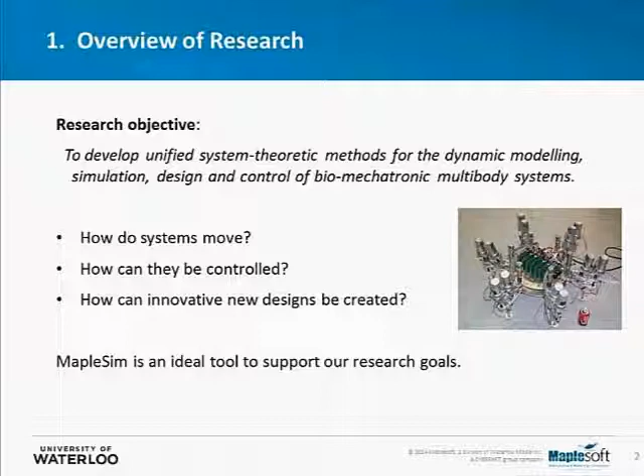In my lab at the University of Waterloo, we mainly focus on dynamic modeling, simulation, design, and control of biomechatronic multi-body systems. To be more precise, we're trying to answer questions like how do systems move, how can we control them, and how can we better design them? For these goals, we found that MapleSim is a very useful tool to support this research.

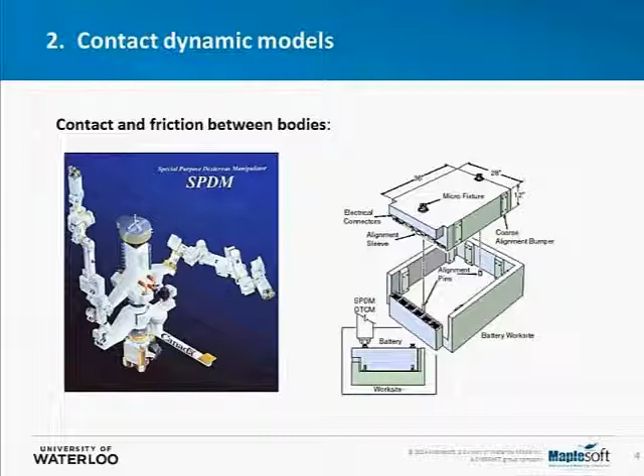Our goal was to create high-fidelity models of these contact dynamics that ran reasonably quickly. Now, when we looked at the literature, we found a couple of things.

First of all, people were doing a lot of modeling using impulse momentum methods. This is an approach where you use a coefficient of restitution, and impact is assumed to occur with time basically frozen. This works very well in computer games where you're not so particular about the accuracy of the physics.

In contrast, a continuous dynamic model would actually represent the contact force between the two bodies during the period in which they are in contact. Now, the most common approach is to assume contact at a point between two bodies and use something like a Hunt-Crossley model, in which the contact force is some function of the depth of penetration between the two bodies. So the two bodies are assumed to interpenetrate, and that more or less gives you a nonlinear spring with some damping to force the bodies apart.

And so at the bottom, I've shown a plot of what would happen if you drop the ball inside a cylinder using this Hunt-Crossley model. The ball will bounce and then roll without sliding forever, because once it starts rolling without slipping, there's nothing to dissipate energy.

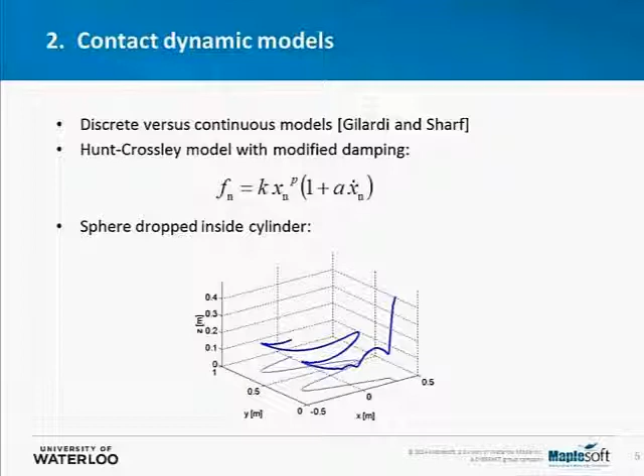We wanted to model contact over distributed surfaces, so we looked at using a Winkler foundation model, in which you had a distributed contact load over the whole surface. Well, it turns out that when you integrate that contact force over the surface, you now find out that your contact force depends upon the volume of interpenetration and not the depth of interpenetration.

And there's a couple of other nice things that naturally arise out of this approach. For example, when you integrate those contact and friction forces over the surface, you naturally get a rolling resistance moment also appearing in your dynamic model. So if we drop the same ball inside the same cylinder, it now bounces, rolls, but then rolling resistance will eventually bring it to a stop, which clearly is a much more accurate representation.

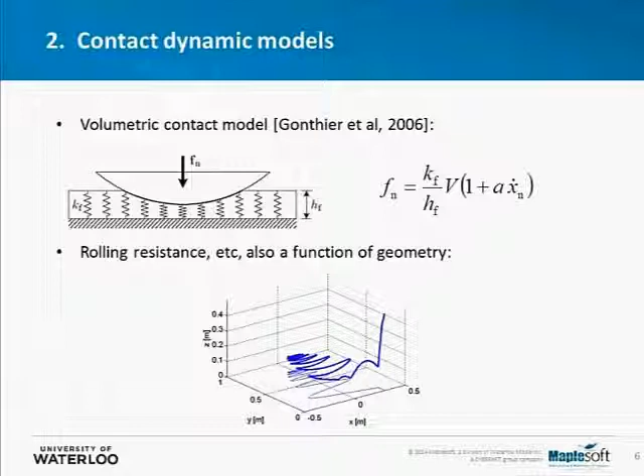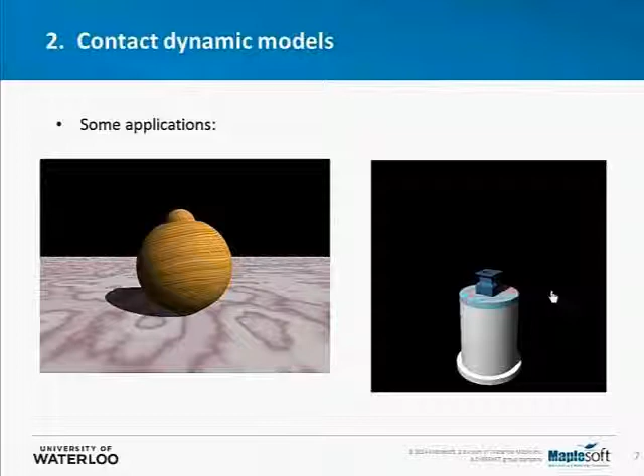We've done a number of applications. On the left is a well-known tippe-top toy. I'll show you an animation of that in a second. On the right is a famous benchmark problem. It's called a peg in a hole, and it involves contact over surfaces with friction.

It was relatively straightforward to implement our model inside of MapleSim. We did this using a custom component in which we could directly code our mathematical expressions. On the left is a representation of the two bodies in contact. On the right is the MapleSim implementation.

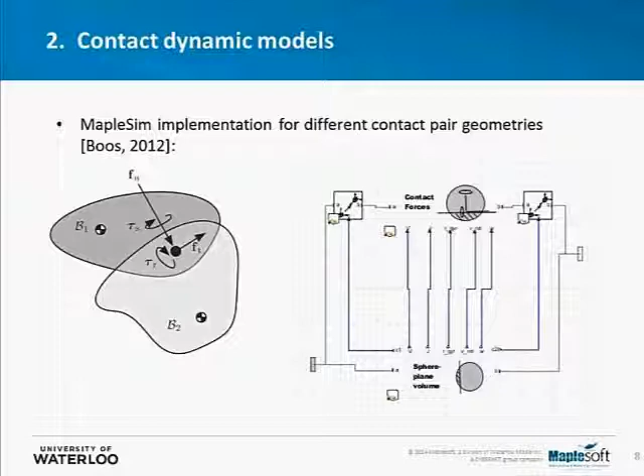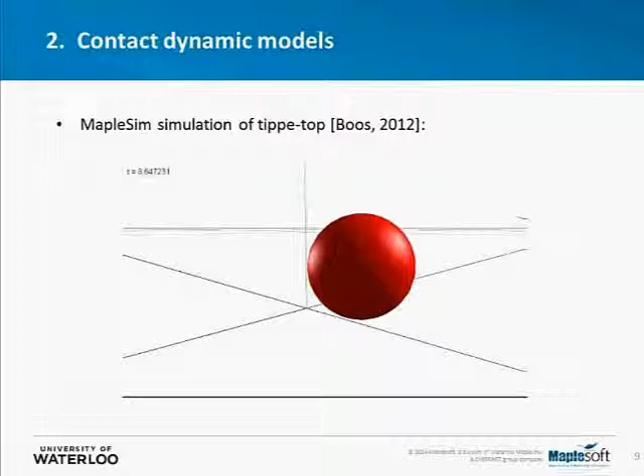And once we had done that, we could go back to that tippe-top and we could simulate the response. And if you've ever played with one of these toys, you'll know that when you spin it, it actually flips over onto the peg until eventually you dissipate energy and it stops rolling. This is a very difficult system to simulate, which is why I'm showing it to you.

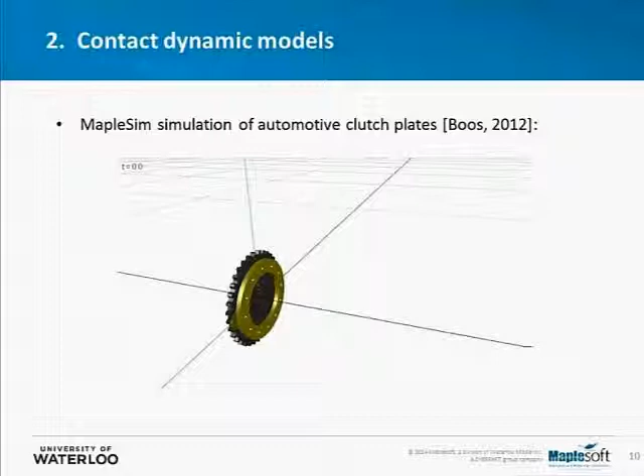Next project also involved the Canadian Space Agency, and this was when they started to investigate planetary rovers. Now on the left is the so-called Juno rover. It's a prototype of a future space mobile rover. And it's being tested on the big island of Hawaii.

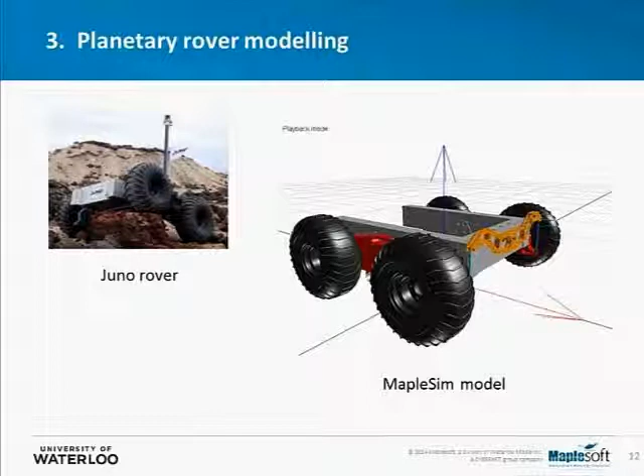On the right is our MapleSim model. And what we've been able to do is capture the unique triple rocker design of this particular machine and see how it moves over rough surfaces. There's a rocker in the front, which connects two rockers on the two sides, and on the two side rockers, two wheels are mounted. This arrangement allows any one wheel to move over a fairly large obstacle.

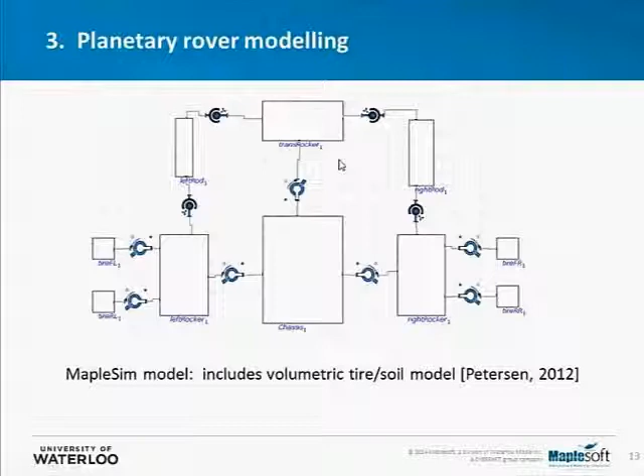This is a MapleSim representation, and on the lower right we have two tires. On the lower left we have two tires, and they both connect to those rockers on the side, which in turn connect to the main chassis through pin joints. There's a rocker at the front that allows wheels on one side to move up in the air relative to wheels on the other side.

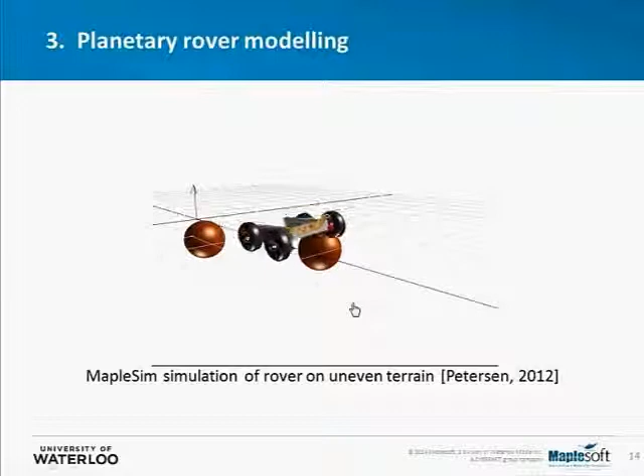And this is best shown through a MapleSim simulation and animation, in which you can clearly see that we can accommodate any one wheel going over a large obstacle.

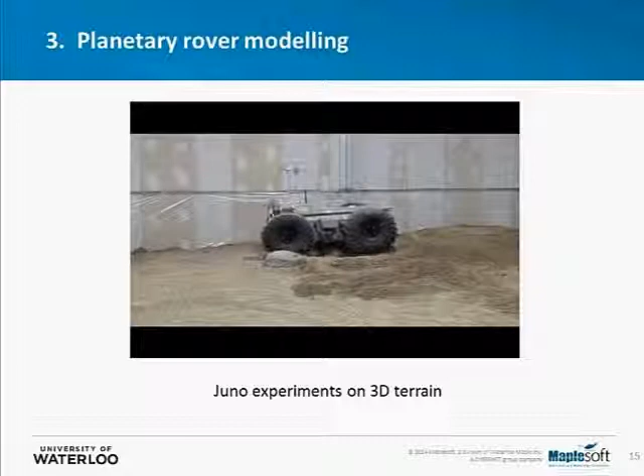We did some experiments on the actual vehicle in order to gather detailed data for model validation. The one thing about planetary rovers is that they don't move very fast, so the dynamics are not always that exciting. In this particular case, we had it going over a 3D surface made up of soft soil, as you might find on the Mars surface.

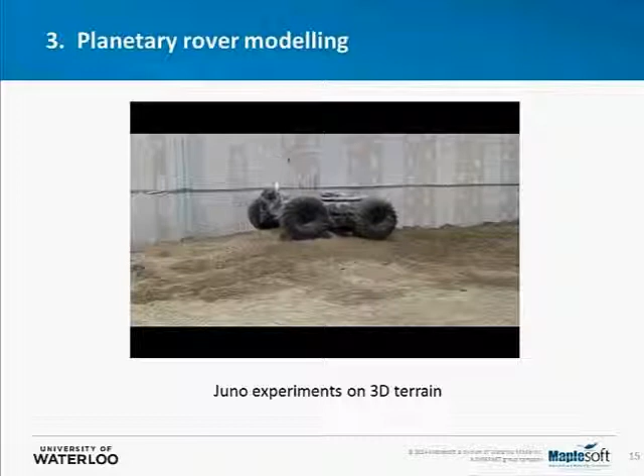We did a 3D LiDAR scan of that surface and developed special models for the tires interacting with soft soils, which allowed us to create this MapleSim simulation of those experiments. The 3D LiDAR scan was used to create the surface in MapleSim. We used our model with the specific tire-ground interface contact forces, and we were able to show very good agreement between our MapleSim simulation and our experimental results. Again, the dynamics are not very fast, so it's not the most exciting maneuver to watch.

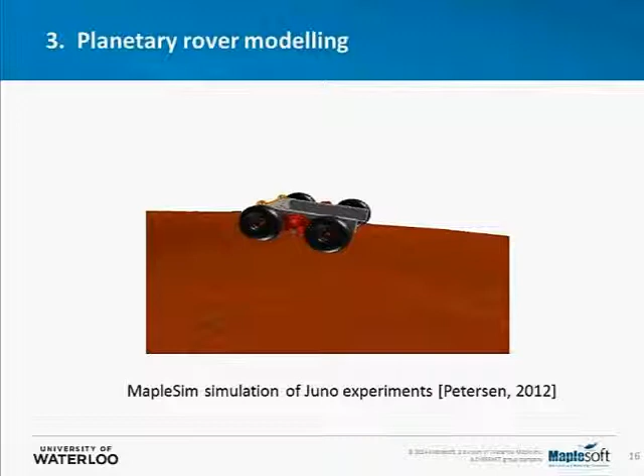I'll now move on to talk a little bit about some of our work in biomechanics and sports engineering. In a lot of this work, we're trying to develop predictive models that will tell us how assistive devices or training devices will help the user. So we're trying to do forward dynamics, in which we specify forces on the system and predict the motion. This is in contrast to most approaches to biomechanics, which measure the motion ahead of time and work backwards to figure out what the forces are.

That's fine to do, but it means you're always doing user testing, and you can't do truly predictive simulations. So we've used our MapleSim model, which is based upon a linear graph representation if you look under the hood for the theory underneath, with Maple symbolics that give us fast simulations, and our previous contact dynamics models. We have a balance controller to make sure that our human walker doesn't fall over.

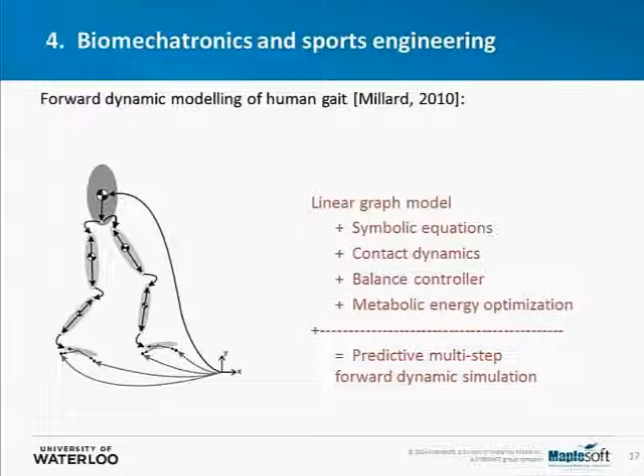In order to create natural gaits, we're minimizing metabolic energy consumed during a gait cycle, because experiments have shown that humans walk in such a way as to minimize their metabolic energy consumption. So to discover these natural gaits, we're using an optimization routine in which we call our MapleSim models over and over again many times. That's one reason why we're using MapleSim in this work, because we require very fast models that simulate quickly, since we need to run them over and over again. What I just showed you was a simulation of a gait that was entirely discovered by an optimization algorithm that minimized metabolic energy.

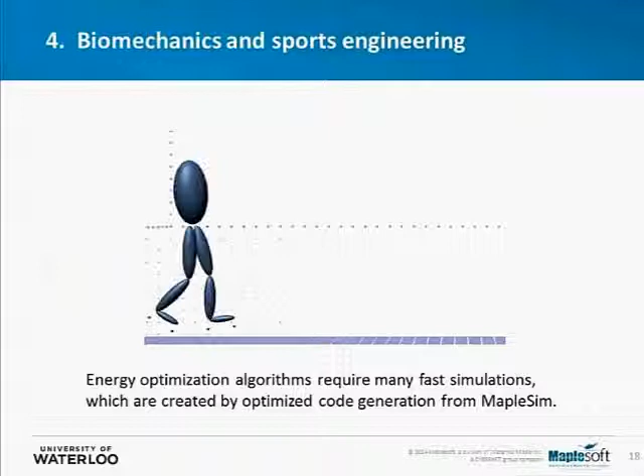We've since added a detailed muscle model to our human walker, and that muscle model includes muscle activation and contraction dynamics. It includes muscles wrapping over surfaces as they pass across bones and joints. And again, it uses that previous volumetric model for foot contact.

Now, we need to validate these models always to make sure that we're representing reality. In our lab, we have a number of useful tools for measuring ground reaction forces and human motions, and we can go back and validate our models to make sure that they're representative of reality.

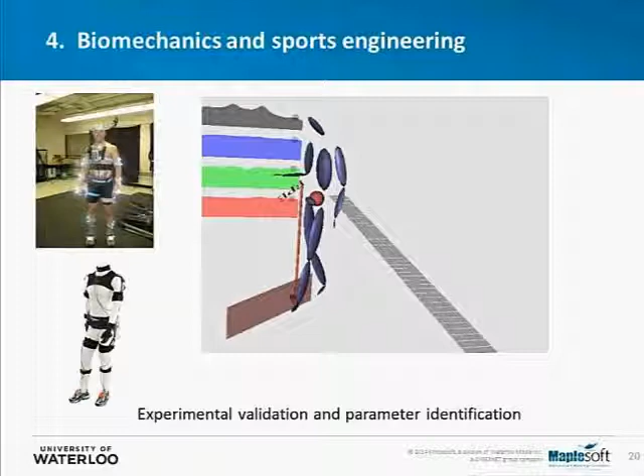Here's another project that we've been working on for quite a few years, in the area of golf equipment design. Some of this work is being done with companies like About Golf and Cleveland Golf, as well as the magazine Golf Digest. What we found is that golf equipment is becoming extremely good. In fact, it's somewhat reaching the design limits that are set by the United States Golf Association and the Royal and Ancient of St. Andrews. So now what companies are interested in is matching the equipment to the human.

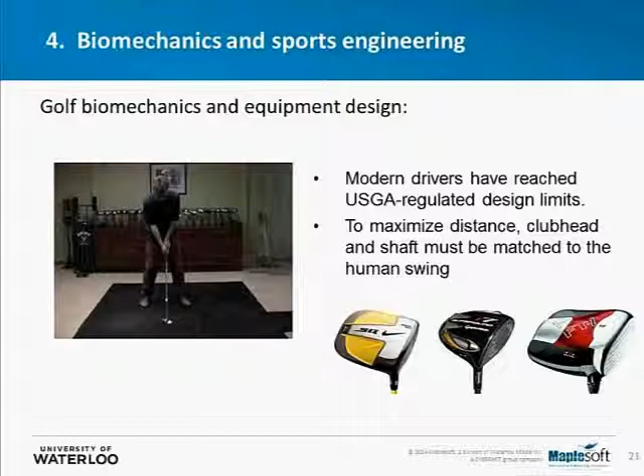That's where our detailed models of club and equipment come in. In this particular MapleSim animation, we've represented the golf shaft by a flexible beam model from MapleSim, which allows us to model a varying stiffness all the way down the shaft. So the shaft might be stiffer at the top or stiffer at the bottom, varying all the way down, and can be tuned for different golfers. The characteristics of the individual golfer are measured and input as 6-degree of freedom motions at the grip. The club itself has known mass and inertia properties that are entered into the MapleSim model. This is a project that we did for Cleveland Golf.

If you simulate and animate the response, you'll see all the characteristics of a normal swing, including the fact that the shaft is bending ahead at impact in order to launch the ball at a higher and farther trajectory. So we have very good agreement between our MapleSim model and a number of experiments that we did to validate the model.

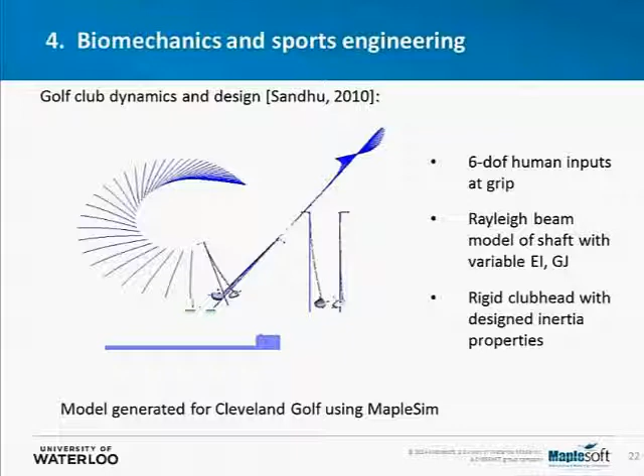Switching to perhaps a more Canadian sport, hockey, although I'd add that Canada is the defending gold medalist in golf, which is returning to the Olympics in 2016. That's a little plug for the Canadian Olympic team.

In hockey, we see something you don't see in golf, and that's equipment breakage. In particular, we see a lot of hockey sticks being broken during the course of a game. Not only does this affect the team negatively during play, but it's a huge cost issue for the teams and players.

In golf, we do a lot of robot testing. Here I have a picture of the famous Iron Byron, which is used to test a golf club. The question arises: why don't we do this for hockey?

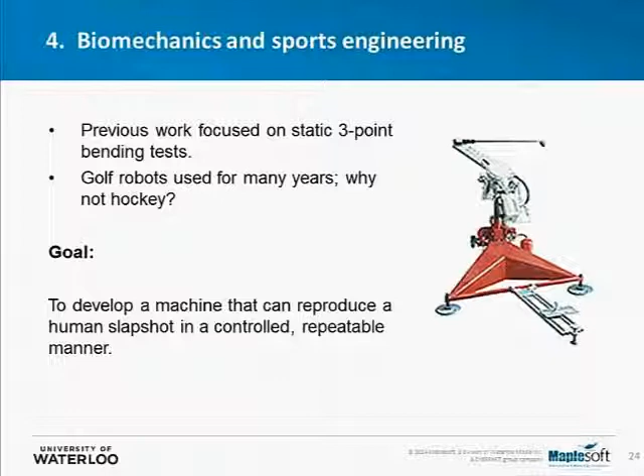The fact is that with hockey, you have to hold the stick in two locations, and the stick needs to be able to bend through a very large angle between those two locations. So we eventually came up with what we thought was a winning design.

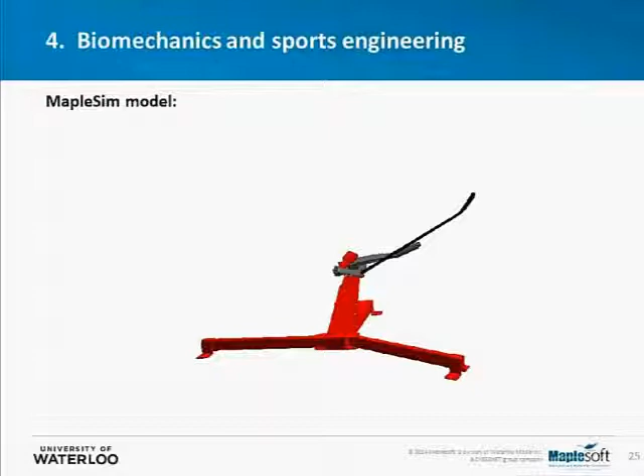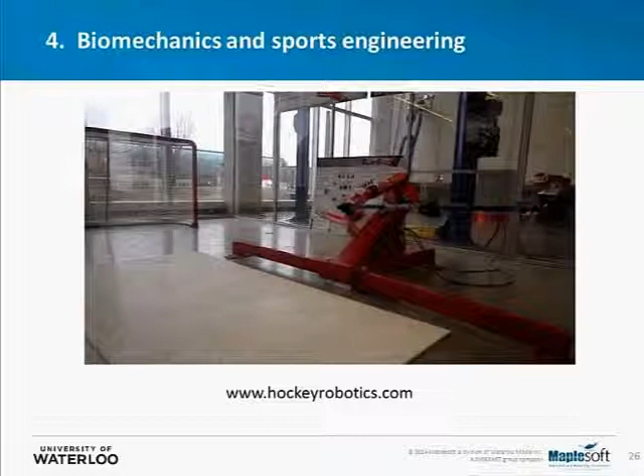I see I only have a couple of minutes left. Let me move on to the last topic, hybrid electric vehicle modeling. In this case, we're using models to improve the design of hybrid electric vehicles, but we're also using models to tune the controllers for these vehicles.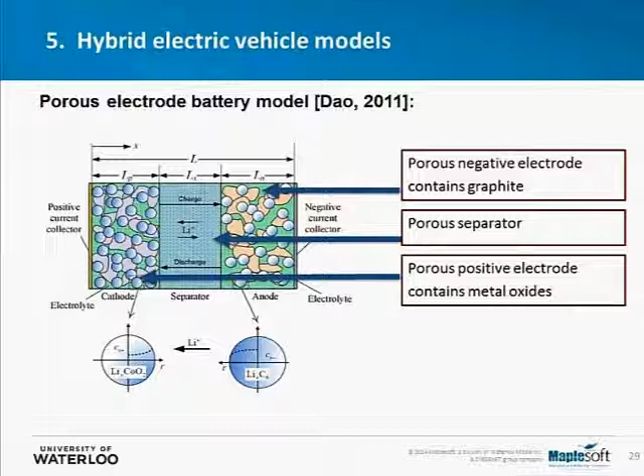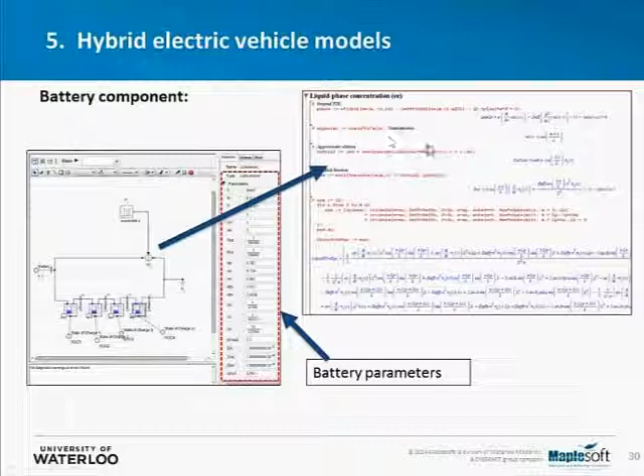For example, for a lithium-ion battery, we've used porous electrode battery theory, representing the changing concentrations of lithium ions from anode to cathode. These are represented as partial differential equations within our custom component template, which we then solve within MapleSim to simulate the battery's response. Comparisons against discharge and charging experiments show really good agreement.

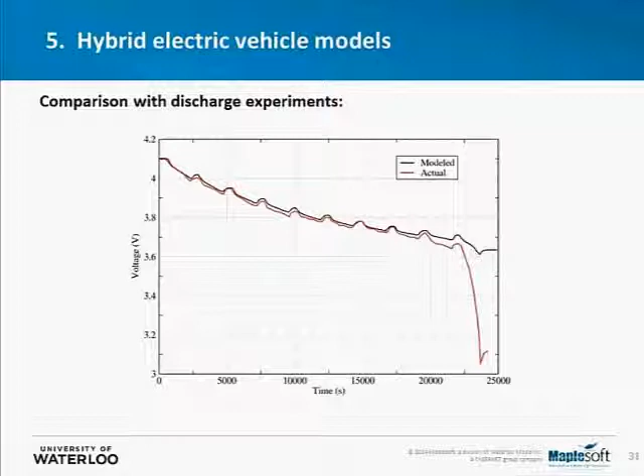We've also created fairly high-fidelity models of internal combustion engines, including the throttle valve, the intake manifold, and the combustion occurring in the engine cylinders. Finally, we've attached a dynamometer to subject the engine to different loads, again for validation purposes. These are all coded as custom components within MapleSim.

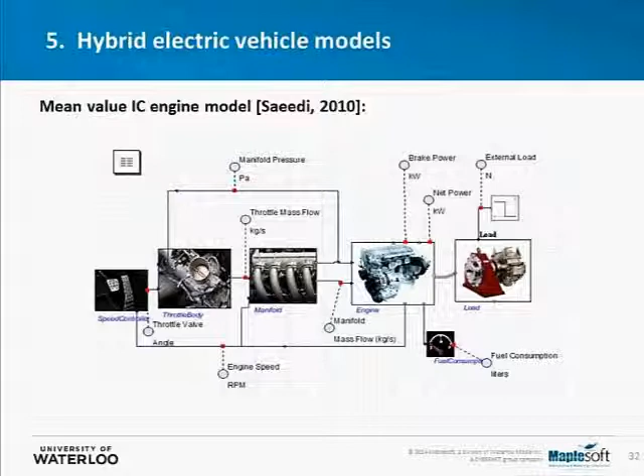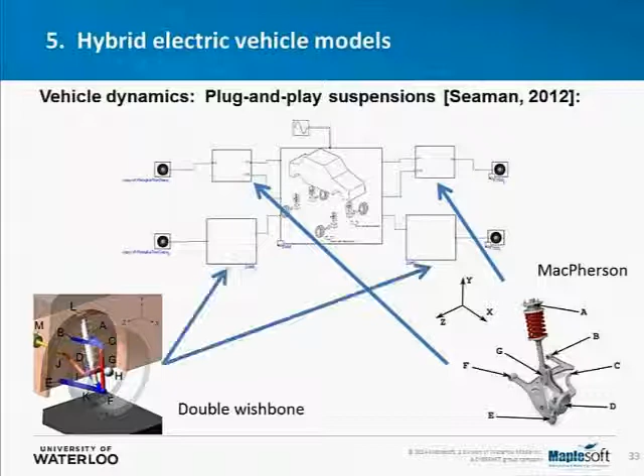We've even done very high-level suspension modeling, so when we want to model a vehicle with a suspension such as a MacPherson strut at the front, we can simply drag and drop the suspension components between the tires and the chassis, creating vehicle models extremely quickly. We've done the same with double wishbones and multi-links.

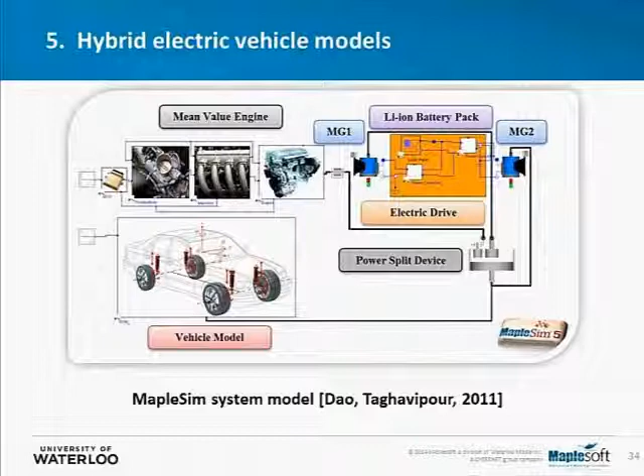Putting everything together, we can create a model of our power split hybrid electric vehicle, including batteries, motor generators, a power split device which handles our transmission, and our internal combustion engine model. With that, we can start doing detailed simulation results.

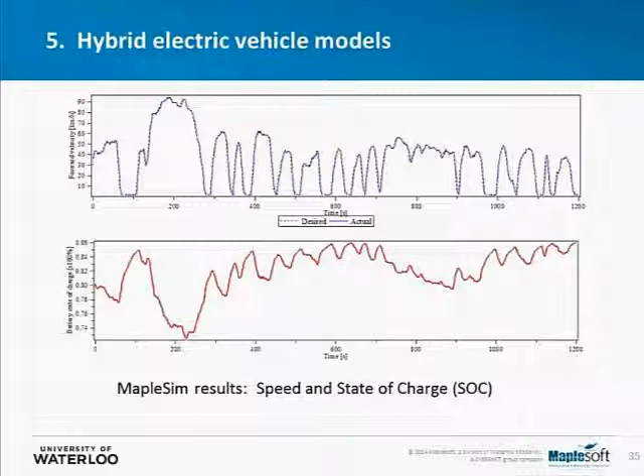On top, we have a typical drive cycle, which is the speed of the vehicle versus time. For that drive cycle, below, I've plotted the state of charge of the battery. With this information, we can now design engine and vehicle controllers that will minimize fuel consumption and maximize battery life.

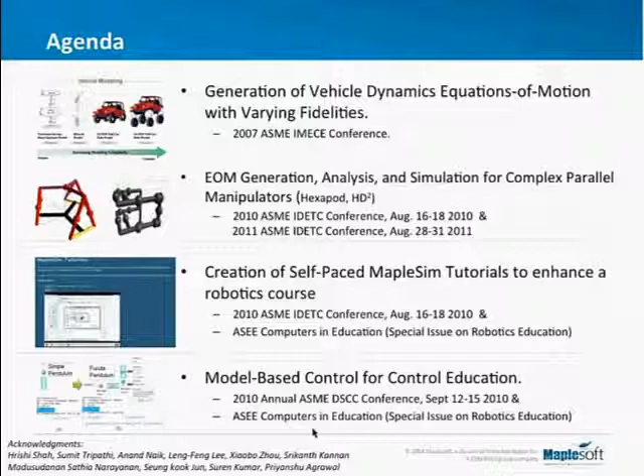In terms of what I'd like to talk about, there are many more topics than what I have listed here, but I wanted to share the following four with you. My interest in all of these is not to delve too much into the research dimension as much as focus the discussion more on how MapleSim was able to help us perform this research better, faster, more reliably. So I'll focus the discussion on those topics.

To start off with, I wanted to discuss haptic steer-by-wire driving simulators, and in particular, the aspect of vehicle dynamics modeling. This was work reported in the conference paper noted here, which is available from our website. But the core concept can be seen from this visual.

In a haptic steer-by-wire simulator, you are removing the steering column that traditionally provides feedback from the drive wheels back to the steering wheel, and you're now replacing it with an electronic connection. In doing so, some of the proprioceptive capabilities that come back through the physical connection of the steering column are lost and need to be replaced by an appropriate simulation. In this case, a haptic simulation involving both the visual dimension as well as the vibrotactile/force feedback dimensions.

There are many factors that affect a haptic driving simulator, but a couple of the important ones are the fidelity of the haptic model, which is essentially a dynamic model of the vehicle, and the haptic user interface fidelity. In today's discussion, I want to focus on the haptic model and the role of MapleSim in helping us come up with an appropriate haptic model.

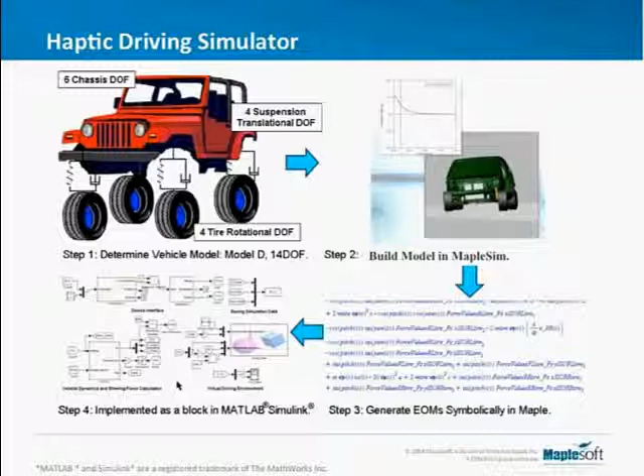This ability to transparently change the fidelity of the model became very useful as we were trying to study the effect of different modeling fidelities on user performance. So what you're seeing here is a simple test setup where a user was using a Microsoft steering wheel, or in this case an Omni type device, to create different types of haptic feedback for driving along different types of trajectories.

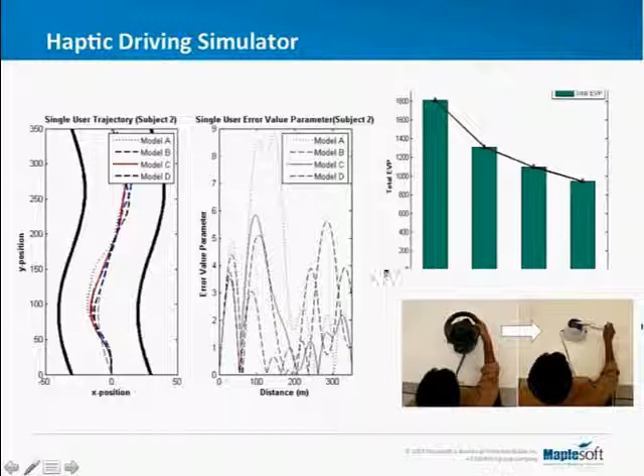Moving along, I wanted to transition into some other work we've been doing with respect to parallel manipulators, and especially in the context of haptic teleoperation with these parallel manipulators.

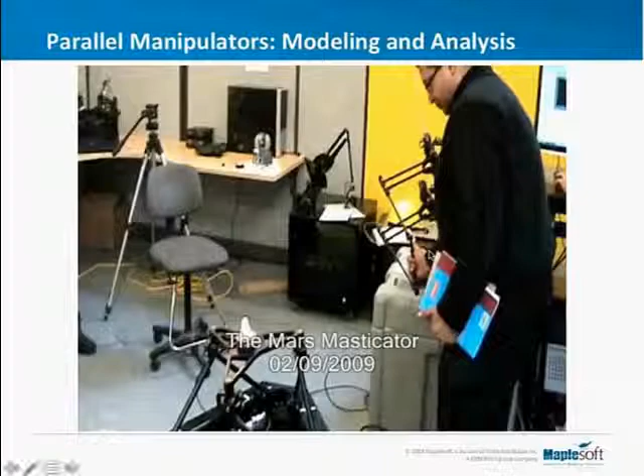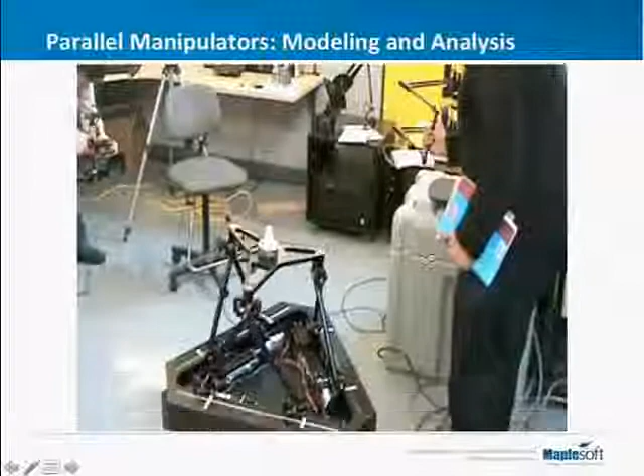Our focus in the next slide is bilateral teleoperation between a master device that I'm holding with my hand and a slave device that you see moving in the middle of your screen. Both these devices happen to be parallel architecture devices, and our interest in making both master and slave parallel architecture was to enhance performance capabilities of these systems, including things like stiffness, stability, payload capacity, and so on.

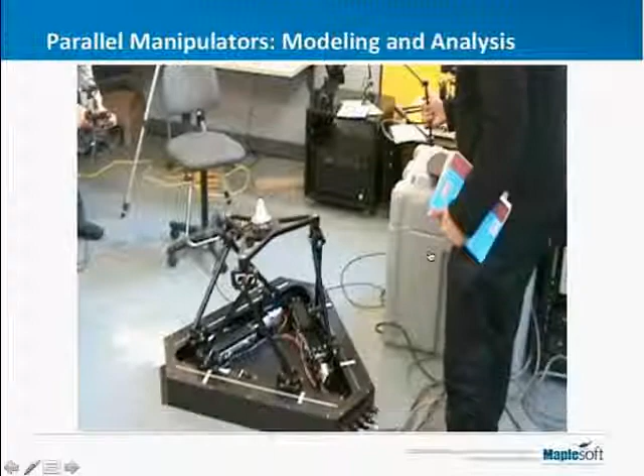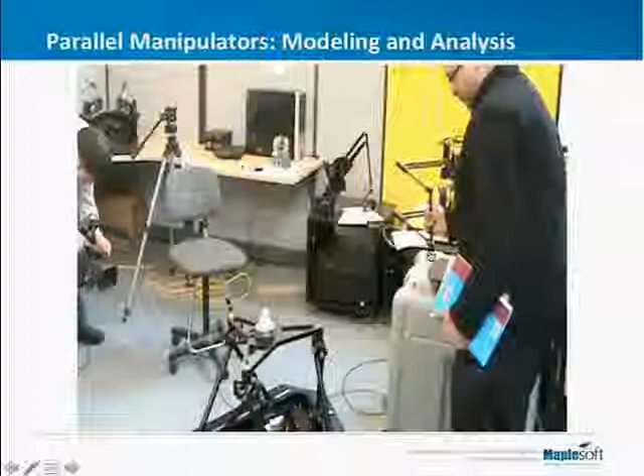The model-based teleoperation, which is the paradigm we were employing, unfortunately requires an accurate model. And coming up with models of these systems for both the handheld master and the remote slave, which have complex kinematic chains, can be quite tedious.

We were also able to extract the equations of motion symbolically that we were going to use for our model-based control. But as an interim step, we were able to export these directly to MATLAB and simulate that system within MATLAB.

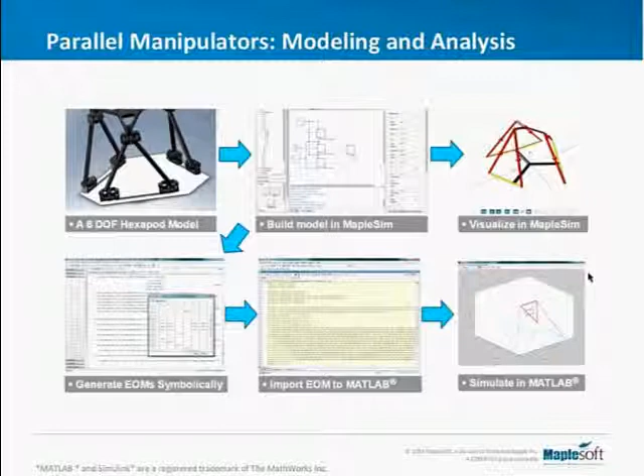We had the ability to also transform these models into different formulations. Some of our model-based work required the minimal formulation, in which case we were able to use just 16 generalized coordinates with 10 constraints. In other cases, we wanted to model this in the full extended formulation, with 24 generalized coordinates and 18 constraints.

Transitioning between formulations of this sort in the traditional setting would have taken a long time to realize. In this case, I think we were able to do this relatively easily using MapleSim, and so that remains one of those positive features that we were able to exploit.

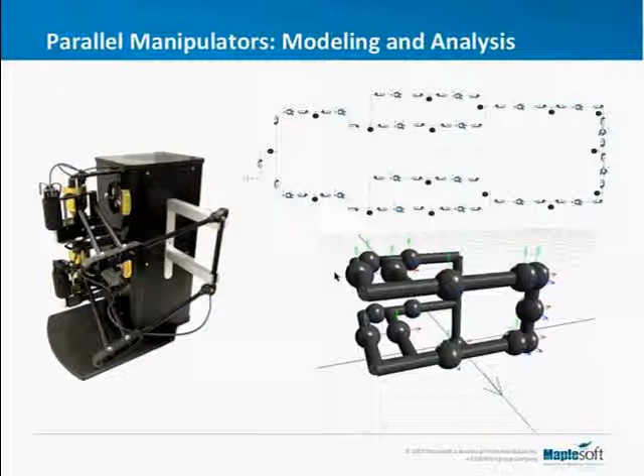So I want to switch gears a little bit here. I wanted to talk about how we were using MapleSim in the context of mechanisms and robotics education. What we found was, as we were training our research students in the research process, we also saw a need to infuse MapleSim into the education process during the process of training them.

And so some of the work we performed was actually reported in a conference paper, and then in a journal paper where it actually won the Best Journal Paper Award.

This process is emphasized in a didactic form, and then homeworks are assigned with this. But we find that when we start to look at systems such as the closed loop parallel manipulators you saw earlier, a hand coding approach cannot scale up easily, so there was a need to transition to the automated approach using MapleSim.

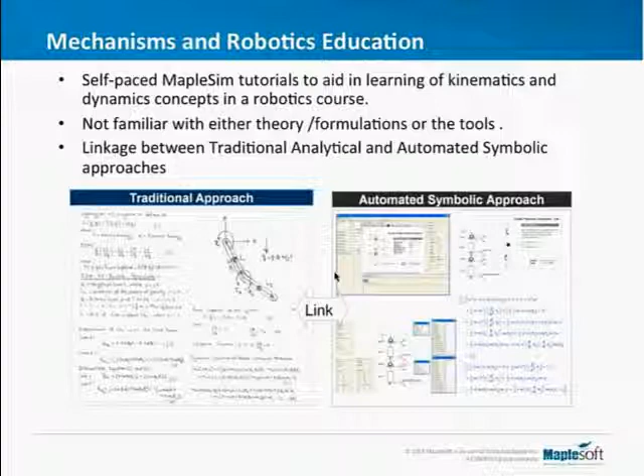But the challenge we saw was that students were not familiar with the theory and formulations, nor were they familiar with the tools. This was a gap we needed to fill in, so we developed a set of self-paced tutorials to help our students make this transition.

We started out with relatively simple examples. The first level were things like the pendulum, to get students familiarized with the tools, then we'd transition into slightly more complicated mechanisms such as the double pendulum or the 4-bar. As a final project for their course, we would have them look at planar parallel mechanisms, as I'll show you in the next few slides.

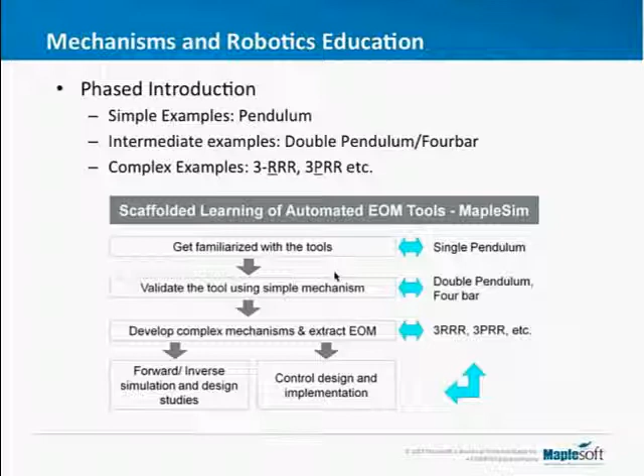So there was a staged process where we wanted them to develop basic competency grounded in their earlier experiences, understanding how a simple pendulum and other things work. Once they were more familiar with these tools, they were able to apply them to more complicated problems. So in phase 1, for example, you see here the simple pendulum example.

In a system like this, hand coding it, developing the equations by hand, probably would have been a simpler solution. But we used this as a way to get students to gain insights into the modeling process. We were able to have them do simple benchmark tests, such as what is the swing frequency of a pendulum like this, or how much torque it would require to operate.

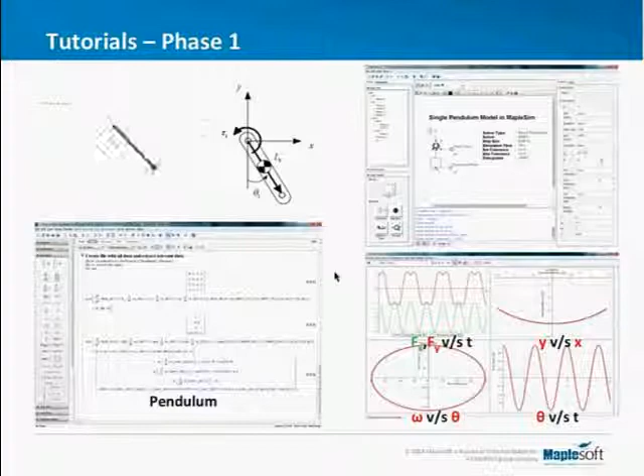So again, rather than keep things limited to simple simulations, we had them perform things like static and dynamic balancing of these 4-bars, which now, because they had access to the symbolic equations, they could see the cause-effect relationships relatively easily.

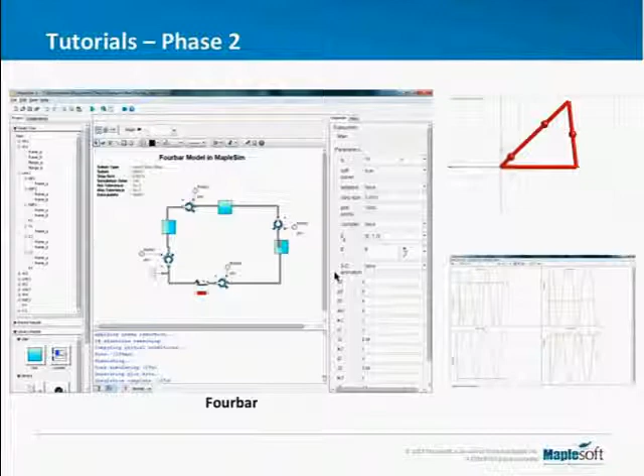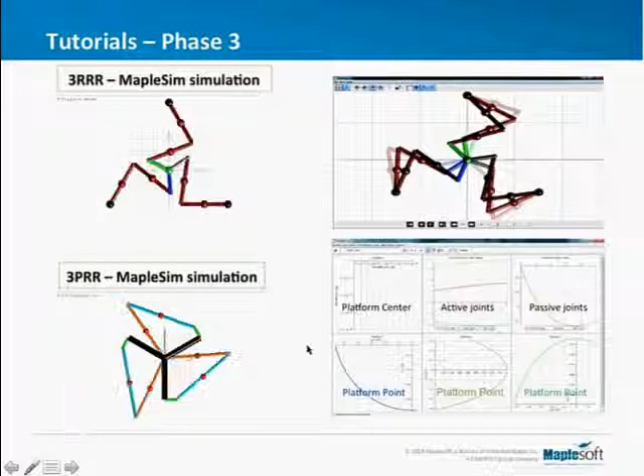Students could now explore choices such as location of actuation, changes in generalized coordinates, changes in some of the physical dimensions of the system, and its effect on performance of the system. I think this slide illustrates why we felt this approach becomes useful.

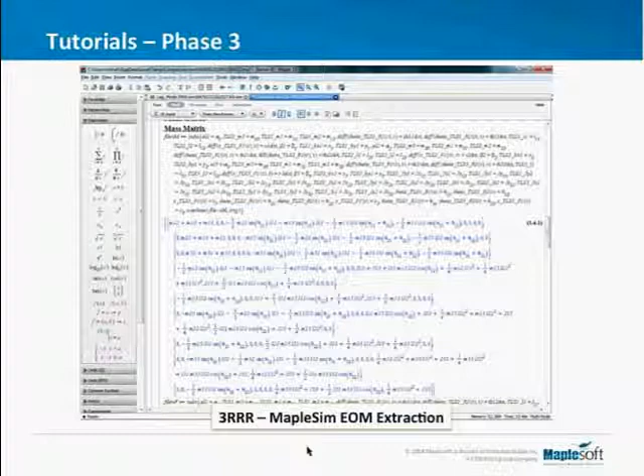But using MapleSim, we could start to explore concepts such as sensitivity analysis, examining the role of changing selected parameters such as the mass or one particular link length, and be able to examine its effect on the composite system performance.

So in summary, as I've gone through these different slides, I hope I've given you a flavor of how we've used MapleSim as a convenient tool to help come up with equations of motion of relatively complicated articulated electromechanical systems.

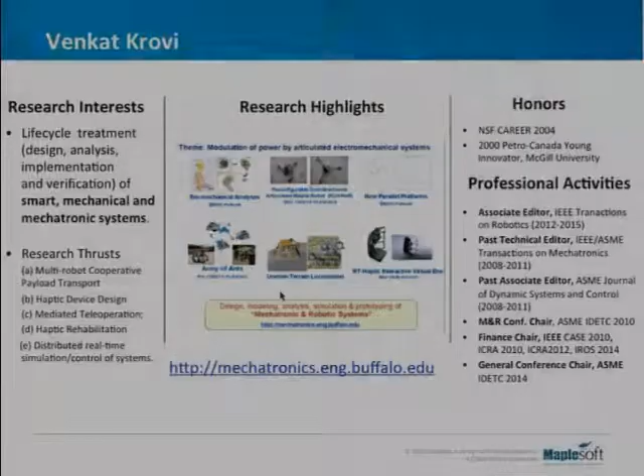Today I'm going to limit my presentation to two applications and projects that we use, Maple and MapleSim. One is a space application in rover modeling, which complements what John mentioned about modeling of rovers. The other is in parallel robot applications.

Rovers, as John mentioned, are the future of space exploration. In modeling these rovers, we need to develop a platform that allows us to easily model them and, if needed, do hardware-in-the-loop analysis. So what we did in this project was develop a special dedicated library for rover modeling.

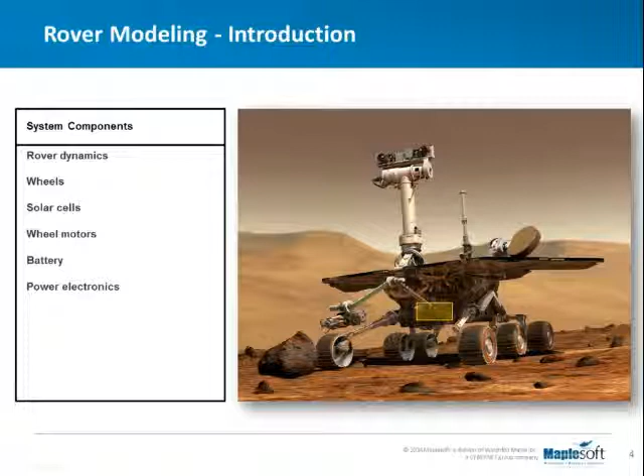If you look at the rover, it's made of the overall rover dynamics that we need to capture. It also has wheels that generate the contact between the rover and the ground. And we need to model the solar cells, wheel motors, battery, power electronics, heaters, robotic arms, and other devices that we have in any rover.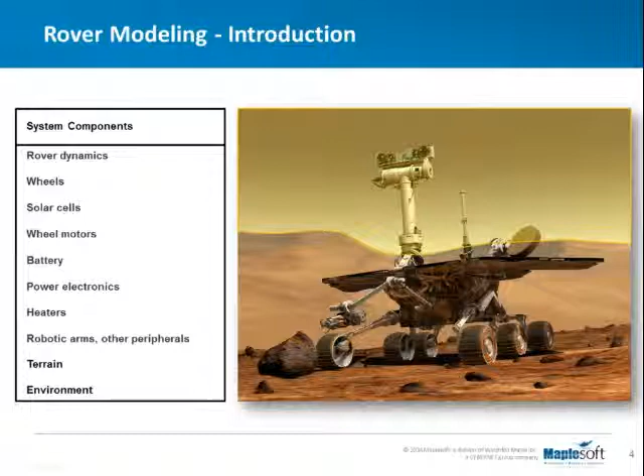The other thing is to be able to add and introduce the terrain, and finally the environment—the location of the sun, the amount of energy the solar panels can receive. What we did was develop a platform that allows us to design and study any of these rovers relatively easily.

Here is an example. On the top right, you see a rover based on a rocker-bogie structure, very common in rover design. If you look at the Maple model on the left, you see the yellow component, which is the rover body. That rover is connected to two revolute joints on the left and right-hand side.

On top, we've added a constraint that generates differential motion between the left and right revolute joint, mostly to make the rotation and orientation of the body less dependent on the position of the wheels. The right-hand side revolute joint is connected to the yellow arm, the blue arm, and the blue arm is connected to one revolute joint on top, and through that to the wheel.

That revolute joint is for the steering mechanism of the rover. From the bottom, it's connected to another revolute joint that connects to the rocker arm. The rocker arm from the top connects to a wheel with no steering mechanism, but from the bottom connects to another revolute joint whose axis is normal to the ground, again for steering of the wheel.

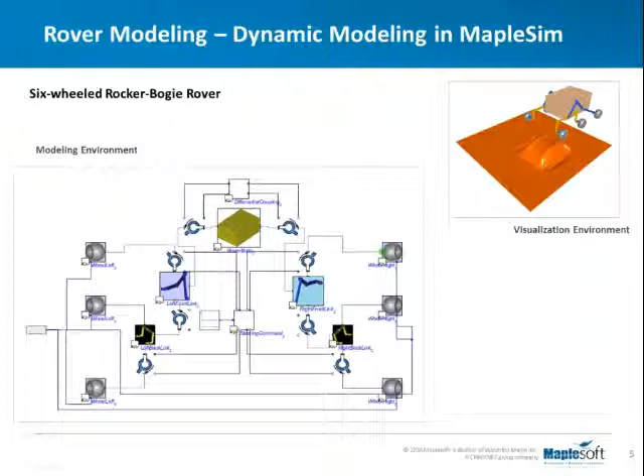We have the same setup on the left-hand side. To simulate and analyze this, we've added a steering command in the middle. From the bottom, we apply the angular velocity input, and from the left-hand side, we apply the steering angular input. By combining these two, we can easily simulate and animate the rover motion.

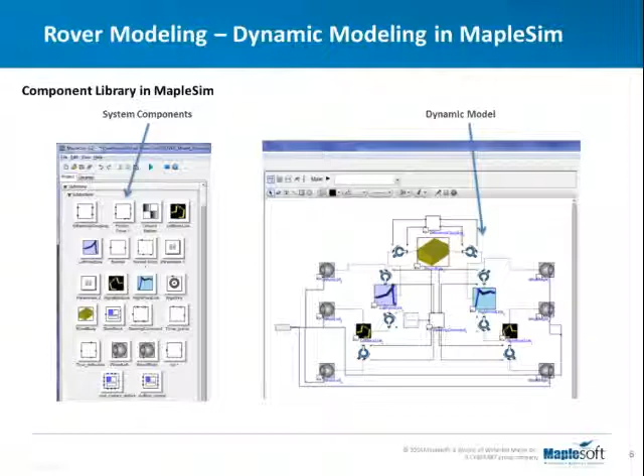Looking at the overall platform, now all in MapleSim, we have a component library with many built-in MapleSim components, plus components we developed specifically for rover analysis. On the right, it shows how the structure of the rover closely matches what the final MapleSim model looks like.

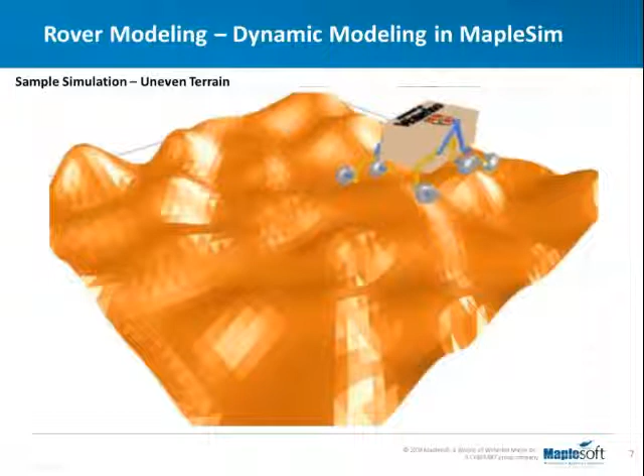Here is the animation done in MapleSim. You can see how the terrain has been introduced and how the rover can move and negotiate it very easily.

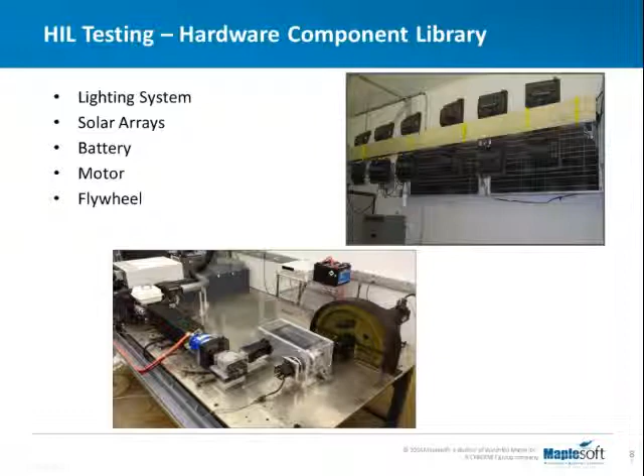The other aspect of this project was to do hardware-in-the-loop analysis. We developed a test platform with a lighting system and solar arrays, which you can see on the right. It also has a battery, motor, and flywheel. The flywheel represents the inertia of the rover, and the battery and motor provide the source and motion of the rover.

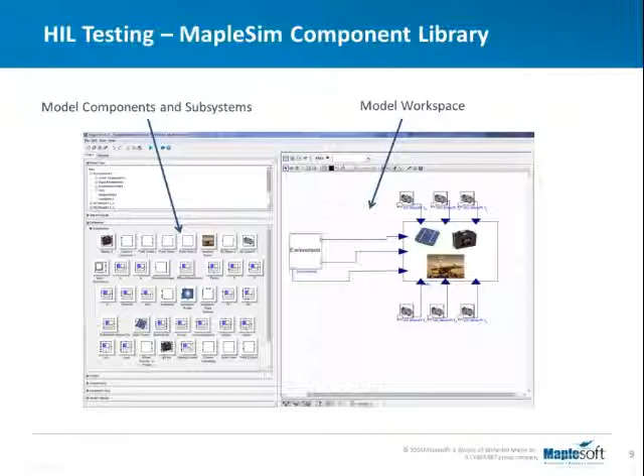The environment provides the terrain data, plus the location of the sun and the amount of energy it can receive based on the orientation of the solar panel. Once that is done, it can be transferred into, in our case, the National Instruments device.

Once it's in LabVIEW, you can add your own GUI and user interface to monitor all the variables.

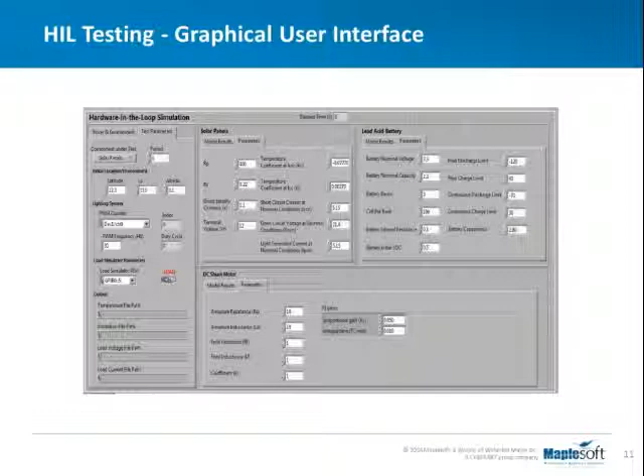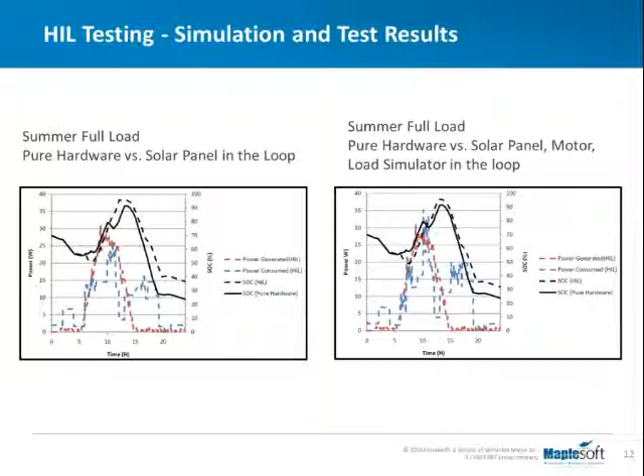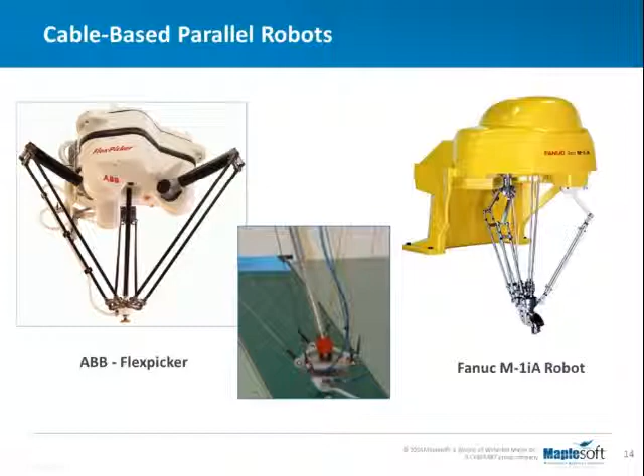When it comes to design and optimization, there are many factors you need to look at to optimize the overall system: the geometrical dimensions of the robot, and the type and size of the motors. By defining an objective function, in our case using off-the-shelf motors with certain torque and speed characteristics, and trying to minimize the torque applied to the motor while considering the maximum speed expected from this robot, we developed a Maple model for optimization.

The first thing we did was to model the cables in MapleSim. Modeling the cables was based on a rigid arm plus a spring, and the spring stiffness was nonlinear. Based on that, we managed to put together the overall model of the parallel robot.

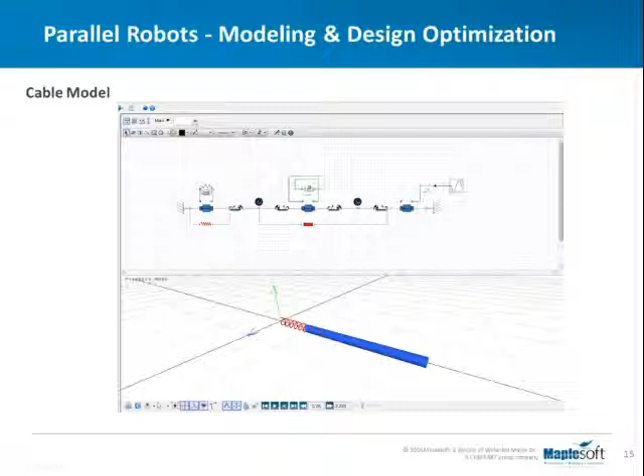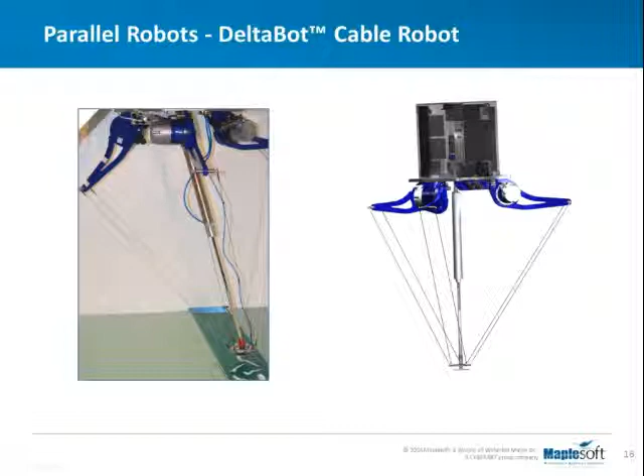This is the overall robot after optimization, which focused mostly on the overall dimensions and the minimum pressure in the main cylinder in the middle. We prototyped it, and here you can see the MapleSim animation slide.

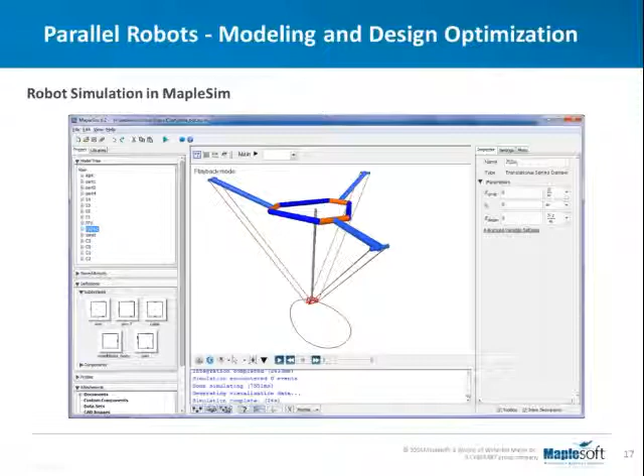This shows, on the right-hand side, what type of inputs we would like to animate the system with. Here I have two animations of the robot: on the left-hand side, all the arms are moving, and on the right-hand side, one arm is stationary while the other two arms are moving.

Based on this approach, it was very easy to put together the overall equations, add all the constraints related to the cables, and based on that, optimize the overall system.